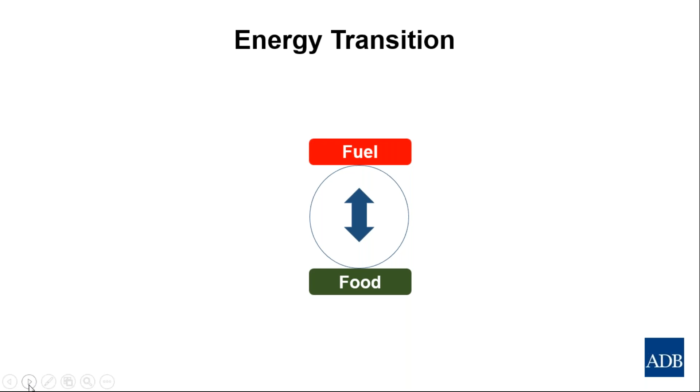So when we talk about energy transition, the common thing that you hear is food versus fuel. The bioenergy dispute in the United States between ethanol production and tortilla manufacture in Mexico was a great example of it. And most people think that's the big argument, but in fact, the argument is a lot more complex.

There's an interplay between fuel, chemicals, fertilizer, food, waste, and energy. And inside that process, where you see this multi-pronged arrow, things transfer from being a waste to being a fertilizer, or perhaps being from a waste to being a fuel, or from being food to energy, in the case of biogas. So there are a number of activities where things are interchangeable, and understanding that there is this interchangeable component means that we can then spend time and create wealth by transferring materials from one use to another.

So that's how we define waste to energy, getting the optimal use out of materials in your economy.

So we'll start off with biogas. Biogas is very, very old. The process is about 120 years old in industrial processes, but as a human function and as a function of animals, it's been going on for a very, very long time. The oxygen atmosphere that we have on the Earth, which is about 21% oxygen, is somewhere around about 600, 700 million years old. Prior to that, we had a very low oxygen content of 2 or 3%. And the bacteria that lived at those times were mostly anaerobic bacteria. That's why many of them are called archaea. So these are the bacteria that naturally occur throughout our nature.

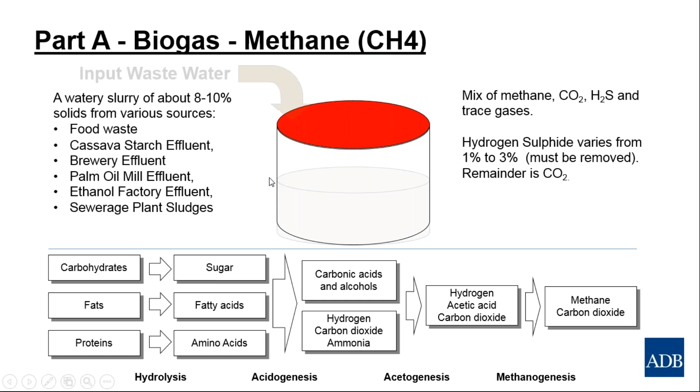You need a tank, you need a lid, you need to introduce the effluent, normally at about 8%, so it's very similar to porridge. You then need to agitate it, and I'll get to the agitation component in a minute. And in that process, you will, over a period of time, produce biogas because there are naturally occurring anaerobic bacteria. And the trick with biogas production is to choose the process that you use to accelerate the production of biogas by making methanogens come into contact with food nutrients in a quicker method. And of course, you'll get a slurry out of that, which is a biosolid.

So you can get that from food waste, brewery effluent. I was recently in Uttar Pradesh to see a sugar refinery on the back of DCM Shriram, a biogas plant on the back of DCM Shriram factory there, ethanol production, sewage sludge plants, Karachi in Pakistan, we're looking at, ADB is looking at doing projects on sewage sludge and cattle effluent in Karachi to create fuel for buses in the Red Line, which we're pitching at the moment. So there's a number of uses for this technology that ADB is employing.

One important point is the presence of hydrogen sulfide. Hydrogen sulfide is a very potent poison and has to be removed. It can be removed biologically, but it has implications on equipment when you want to make electricity, or if you're in boilers, it can have an implication on the surfaces of boilers.

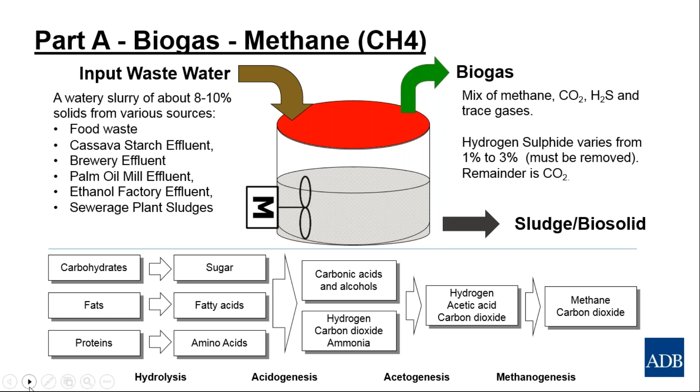So these are the sorts of things that you can make biogas from, and biogas can be 30%. Landfills are notorious for having poor production of gas, and the gas varies. You can then make it from factory wastewater. There's a lot of work going on in palm oil mill effluent, cassava, ethanol, food processing, food waste, animal feces, and of course sewage.

A key term in the production of biogas is the term COD, chemical oxygen demand, because there's a direct relationship between chemical oxygen demand and the production of biogas. There are some formulas related to what the inhibitory substances that slow it down are, but generally speaking, you know that from a palm oil factory, you might get 65% methane. From a sewage plant, you might get 25%. So it's a very well-defined and well-developed industry.

Anaerobes will only come to eat when food is put in front of them. So their life is eat, reproduce, fall asleep, wake up, eat, reproduce, fall asleep, wake up. It's probably an idealistic existence, but it would be a bit dull.

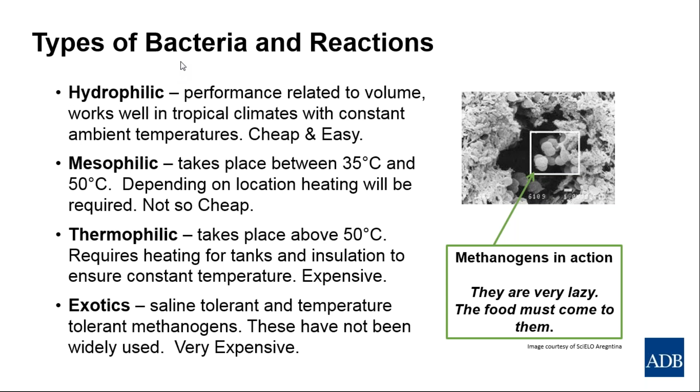You mix in the wastewater, you mix in any additional nutrients - in this case there was a root cake available from the factory owner, so we could increase the biological load. You put it in a reactor and create turbulence, moving the materials around so they interact with bacteria. You produce gas. That biogas is wet and has hydrogen sulfide in it.

You put it through a condenser to dry it out, and then you put it through an H2S scrubber to strip out the H2S, and you can vary the locations of condensate and scrubbing depending on the use and how you configure your plant.

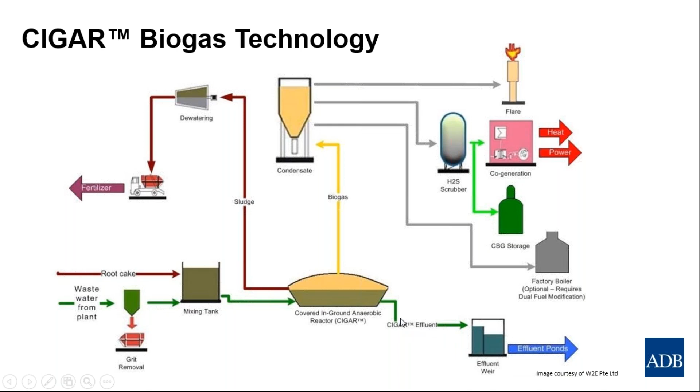It normally comes out at about 3 to 7% solids, depending on how much water you're using, and you want to try to get it to somewhere about 18 to 24% solids so that it can be transportable and usable. And then of course you have some effluent where you might have 5% or 3% of the COD load left in the effluent, which then needs to go off to ponds to be treated.

So here's some of the numbers, and there are 3 columns here. One is where the factory was operating at 55% capacity. It couldn't get access to energy because Electricity Vietnam was providing energy from across the border, and with cassava starch, the cassava rots over 3 days.

So if you don't have energy for 3 days, you've bought roots and you can't make money. So the factory wasn't making much money. Just at 55% capacity, by providing a stable electricity source...

...the project added $800,000 to the factory's profitability. And in fact, it allowed them to purchase more roots. As a result, it basically created $1.3 million worth of additional profits for the factory owner.

Now, there are a few points I should note. The emissions component here, emissions of carbon dioxide - at that stage, the price the project secured was $14 a tonne. This was in 2008, starting 2009, just before the collapse of the carbon markets.

Those prices are no longer available, but still it's a significant increase in profit just for doing biogas. If you want to have a look at those numbers, I'm sure you'll have some questions, and I'm happy to answer some of those later on after the presentation.

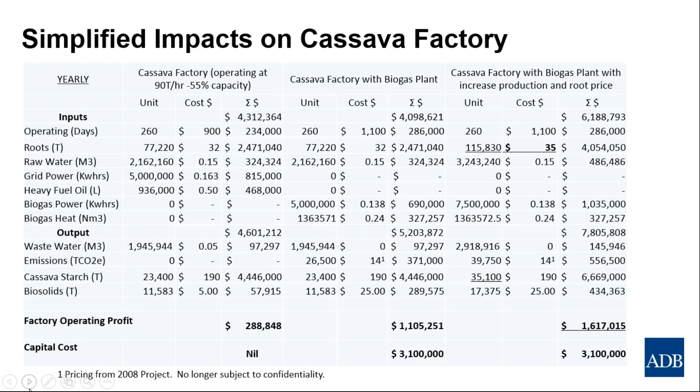Looking at the social impacts, farmers don't want to plant a crop they can't sell. Because the factory wasn't buying as much root as normal, farmers were planting different crops. When the factory started operating, they planted more cassava, knowing they could sell it, and because it was profitable and easy to manage. So as a result of the factory being upgraded, not only did the factory owner make money, but local farmers made more money too, creating a virtuous cycle: a more profitable factory means farmers get higher prices and can sell more, which increases the root supply of cassava, meaning more biogas, more electricity, and again a more profitable factory.

It stabilized. The factory is now looking to convert its entire output of native starch into compostable bags and cutlery, and is in discussion with a Taiwanese group. This project was very interesting because the biogas plant makes it a potential target for a buyout, where it can be upgraded into a very clean and green asset. So the factory owner not only got increased profit, but the valuation of the factory went up in terms of what he could sell it for. That deal is in process at the moment.

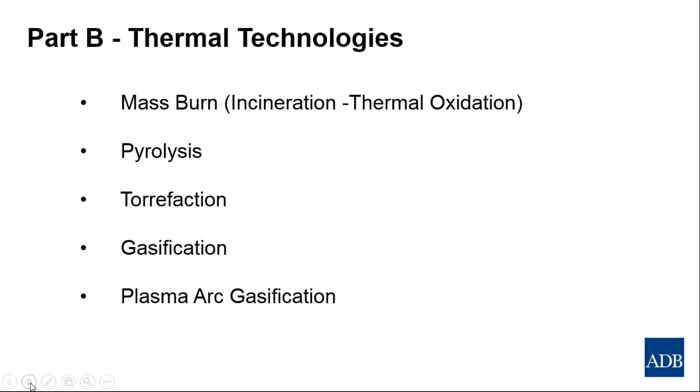So in terms of thermal technologies, there's obviously the classic one, incineration, which is thermal oxidation - you're using oxygen to drive and burn a reaction, blowing oxygen in to increase the energy. The other family is pyrolysis, torrefaction, and gasification. Technically they're different, but from an operational and output point of view they're similar types of reactions, so I've grouped them together in the explanation. Then there's plasma arc gasification, which everybody raves about and companies like Siemens have played with, but it's still not a commercially viable technology at this stage, though it may change.

Mass burn is very simple: you prepare your feedstock, put it in the boiler, bottom ash comes out, and you get energy in the form of heat, which can make steam, which can be used to make electricity, or the steam can be transferred off for heat use. Then you have entrained gases and entrained particles in the flue gas from combustion. These have to be cleaned out, and in some cases you'll get fly ash, which can contain toxic materials - I'll talk about that in a minute.

So it's proven technology. Fixed grate boilers have been used for over 150 years - it's very solid technology. Most of the boilers made in Japan and China are pretty much using fixed grate mass incineration because it's simple. I know some companies are doing more advanced gasification, and I'll talk about that in a minute, but generally speaking this is the least cost, easiest operation to use.

Depending on what you have and how your process works, you might have 10% of your mass as ash. You'll have bottom ash, which we were talking about before - that can be used to make bricks. In China they're making bricks out of it, depending on what's contained in it. And then there's fly ash.

Fly ash is a real problem for incinerating anything with chlorine, because when you have chlorine in the presence of oxygen between about 250 and 900 degrees, but especially between 450 and 800 degrees, you make a family of chemicals called dioxins, and also furans, which are persistent organic pollutants. They're very dangerous. The Americans used one of those chemicals to defoliate parts of Vietnam. It was known as Agent Orange.

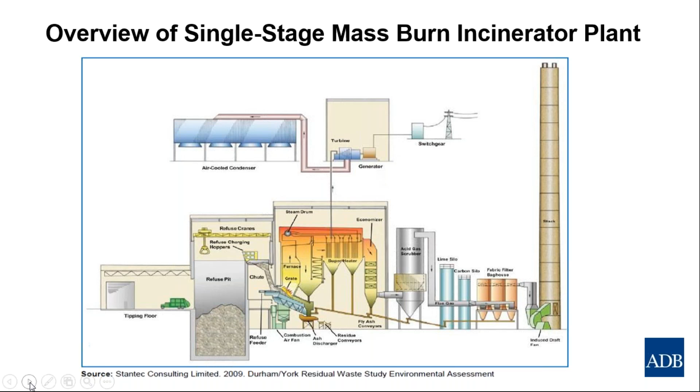I was recently at an incinerator in China, and in front of it they had a very large billboard showing in real time what the HCl, dioxin, and other gas pollutants coming out of the incinerator were. I'll try to share that with the audience at the end of the presentation. In China, every incinerator must in real time have a billboard in front showing these results, and it must be certified by a third-party body that the results they're giving are reliable.

This is an incinerator in Finland, outside Helsinki. Please tell me if people can see this.

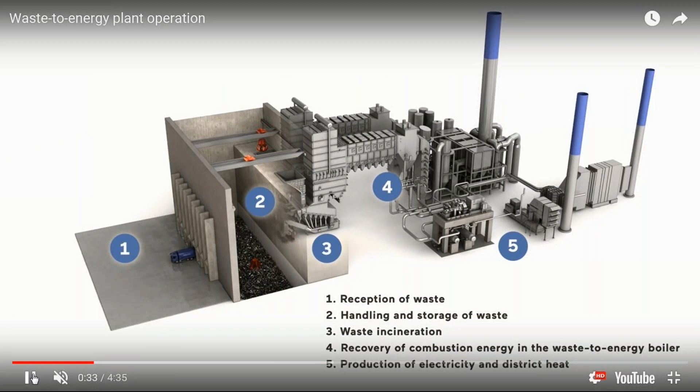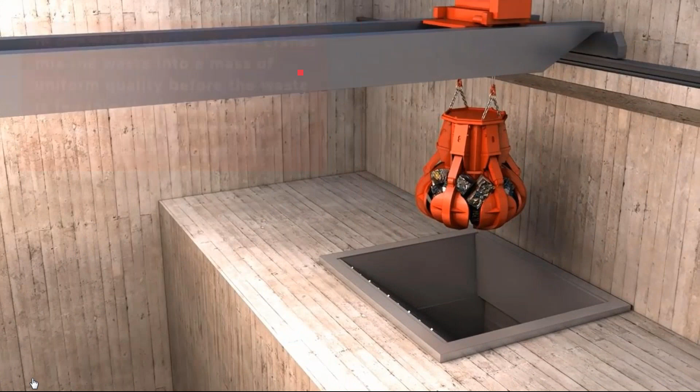So this is the basic structure of the plant. It has a large hopper. It treats about 350 tons of waste a day, about 140 truckloads. It goes into a hopper, which normally carries 2 or 3 days worth of waste, and the operators use the hopper to a certain degree to dry the material out or break it up. It goes into the chute, then is injected into the boiler, and is kept on the grate for about 2 seconds. That's typically what happens in an incinerator, and that's a good definition of what gets incinerated.

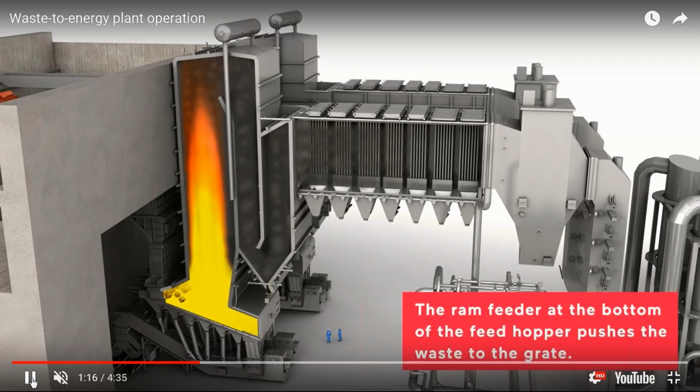The material burns, creates hot gases, and you'll see entrained particles in the gases going through. This is a very important slide, because it shows that at the surface of the grate it might be 1100 degrees Celsius, but by the time it's reached some of the boiler tubes at the top of the stack, it's 900, and as it goes through baffles, it goes to 650, then 400, then 220. By the time the material gets to 220 degrees, it's not really producing much dioxin, but in the process between the top of the boiler and about halfway through the ash removal equipment, they are forming dioxins and furans. So you need very good quality stripping of flue gas entrainment.

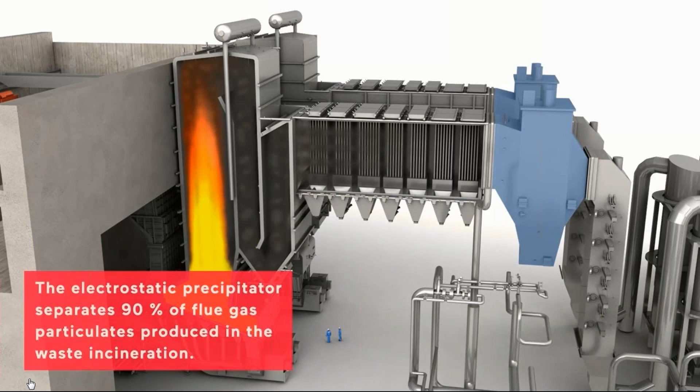So I'll start the video again and we'll go through. You'll see the gas going through. Fly ash is recovered at different stages of the process. Underneath the grate you'll have bottom ash, which falls out, but the fly ash is stripped out using a number of processes, including an electrostatic precipitator, which is pretty much a big mosquito coil—like those mosquito zapping machines that are very common. The ESP is pretty much the same as that, I know it's oversimplifying it, but that's what it does.

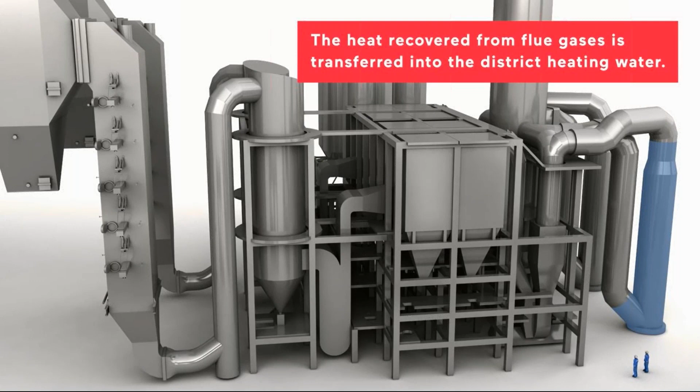Then they use lime dosing. Lime counteracts the acid component of the gases and normalizes the material. Then you have bag filters, which are very important—inside the bag filter they'll put a reagent that locks up materials like furans and dioxins before they come out. This plant has very high energy efficiency; it collects heat and sends it around to the community as district heating, a very important process in Northern Europe because heating costs are a tremendous cost.

By the time the gas gets released, it's about 50 degrees Celsius, which is still quite warm, but it meets all the European directives for release of gas.

The issue with incineration is that whilst the process is energy efficient, it's expensive to build an incinerator, and you do have an issue with fly ash, which is the limiting factor in its success in rollout. A lot of the work we're doing at the moment is looking at new solutions for how we can deal with fly ash, how we can chemically immobilize it, what we can do in terms of creating ceramics using hot isostatic presses and other activities.

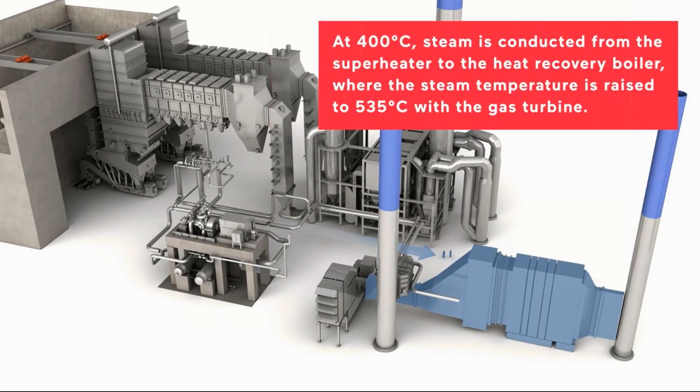This talks about the heating and cooling system. You're basically stripping heat out of the gas and using that, and then it goes off to a turbine, producing electricity for the local community.

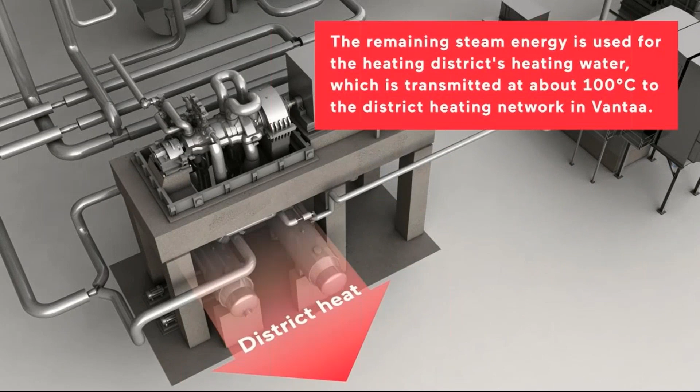But the district heating component of this makes this technology the most attractive. In China, it's very well adopted because of its capacity to provide district heating. One of the projects we're involved in is looking at providing district heating and options for people currently using coal in the areas around Beijing, Tianjin, and the Hebei area. There's a large amount of investment in getting people to have area heating during the four months where it's very, very cold in northern China.

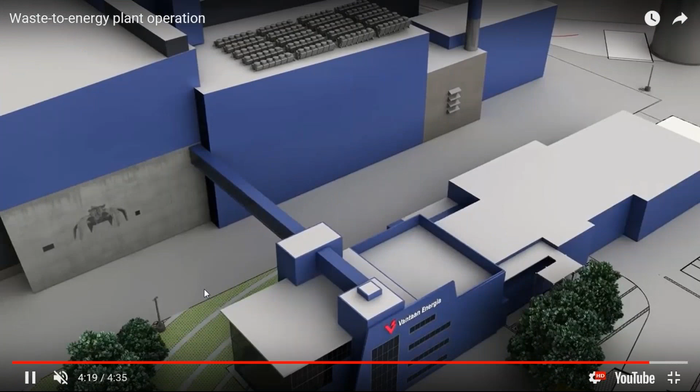This means that they don't burn coal, which means there are not the levels of pollution that currently occur in Beijing. And certainly Delhi has that problem. I was in Delhi about four years ago, and the pollution in Delhi was very, very bad. So perhaps that might be some learning that can get transferred across.

Let's go back to the presentation, and I'll restart the slideshow. So we've done that slide.

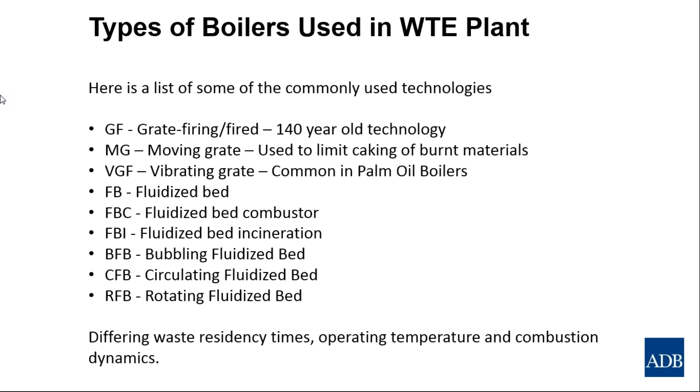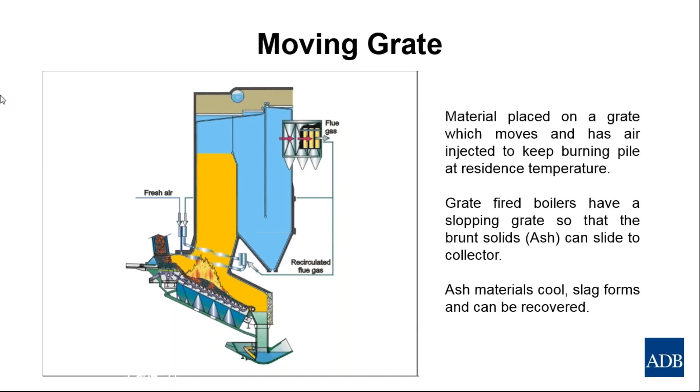A moving grate is pretty simple - it's basically placed on the grate and it burns. That's pretty much it, and bottom ash comes off, with possibly some slag depending on what's entrained in the materials. If you're doing something simple like wood chips or empty fruit bunch or cassava, you won't have much gas treatment needed because you're not likely to have entrained dioxins or chlorines. But if you go to a bubbling fluidized bed, you'll see how that process varies.

Excuse me, sorry, we just had a power outage. Can you hear me? Yes, I can hear you and I can see the screen as well. We just had a power outage in Manila. Oh, it's fine, we at South Asia are also used to these power cuts. Yeah, I know, but it was pretty good because the power came back on in literally a quarter of a second, so that was very good.

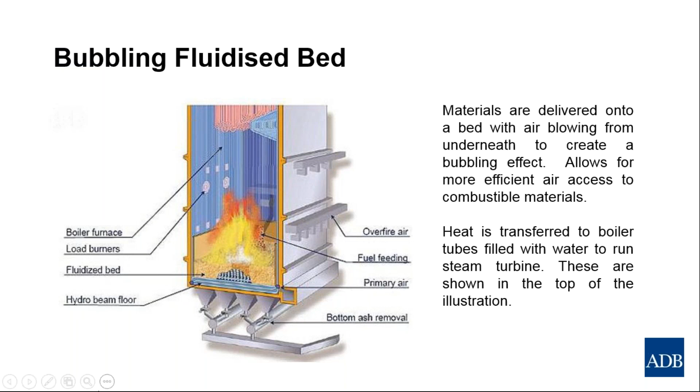So key terms - many of you will know these, but I'll go through them again. Megajoules is a measure of energy, and there's high heating value and lower heating value - how that is determined varies. There is a difference between the high heating value and low heating value of a material. Nitrous oxides - NO2, NO3, NO4, SO2, SO3, sulfur oxides. CHONS is very important - the relative proportions of carbon, hydrogen, oxygen, nitrogen, and sulfur are a determining component of which particular technology might be better.

Heavy metals - everybody talks about them, but here I've actually specifically spelled out what they are: cadmium, mercury, lead, arsenic, manganese, chromium, cobalt, nickel, copper, zinc, selenium, silver, antimony, and thallium.

Just as an aside, I was recently in the Marshall Islands looking at a project, and there was a technology introduced there to mass burn plastics waste in the open, which we gave some very strong commentary about that not being a great idea. When the ash was tested, it had a very high chromium content compared to everything else. That was quite a remarkable outcome, we thought.

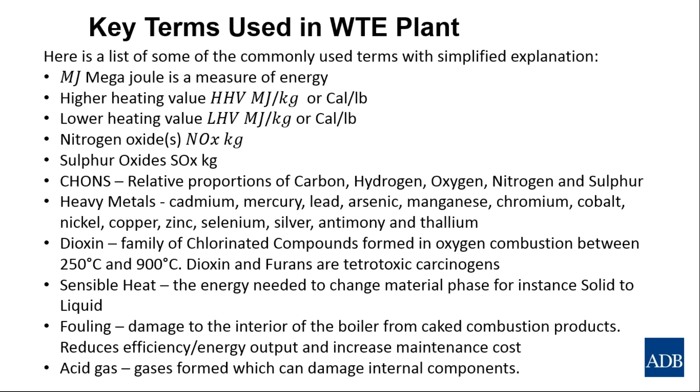Fouling is where you get caked materials that look like they're sandblasted onto the interior of facilities, and that has an implication on the operations and maintenance component. Acid gases are gases formed which are quite damaging to internal components, and that's because of the presence of sulfur and other materials.

Pyrolysis is thermal decomposition in the absence or near absence of oxygen, and it produces syngas. I know that India, especially Ankur Scientific, are extremely good at making small gasifiers for agricultural applications like rice husk. They're very popular in Southeast Asia. So this process of gasification and production of syngas is well known.

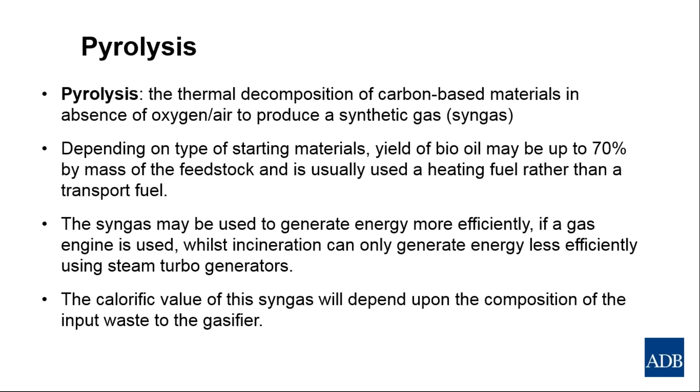With pyrolysis, you don't make so much syngas, you actually make more bio-oil, and you have tars as well. The next step is to step up to gasification, and that gasification process is the one that's very, very popular in Southeast Asia. Again, it's just a difference in temperature and a slight difference in process, but they're a family of materials.

Now, people will tell you, 'oh, we don't have any oxygen, so we don't create dioxins.' That's not entirely true - you can't say they're not produced, you just say they're below detectable limits. I've seen documents from suppliers in various parts of the world claiming no dioxin is produced, and you should be very careful of that, because there's oxygen in the container, in the materials, when you start the process.

Torrefaction is another process which occurs at slightly lower temperature. It's used in Australia extensively to deal with dead animals from a biosecurity point of view. Large chicken farms and large beef farms have a lot of dead animals, and also a lot of waste, which is obviously a biohazard under Australian law. So what they do is treat it in a pyrolysis process, and that is then able to be used as a high surface area biochar, which is very useful for entraining nitrogen-fixing bacteria and other things in the soil. So it's sought after by farmers to buy that product.

Plasma arc gasification - if we lived in the world of Star Trek, this would be the ultimate technology. It just decomposes everything down to a glass slag and maybe a bit of entrained metals. The only problem is it's about 4.5 to 6 times more expensive than currently available technologies, and also it's extremely difficult to operate.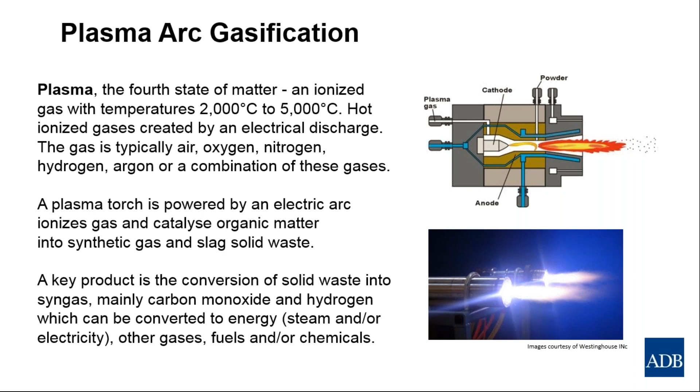In the mid-1990s, Siemens had an explosion in East Germany that killed 6 people, 2 of whom were PhDs working on the technology. So it was originally developed by the Russians, as my understanding goes. And when you see the space shuttle, that's actually a plasma arc made by Westinghouse, which is injecting a spark to light the bottom of the space shuttle so it can take off.

So this is a process from a project in Malaysia, on the site of a paper company in Pahang, and they have fuel storage. The most important thing for these technologies to optimize them is the handling and feeding into the boiler. In a large municipal solid waste incinerator you have a little bit of flexibility about what you can do, but in these processes where you have a fixed biomass, fuel handling is very important to make sure you get optimal results. So it's basically 4 stages: fuel handling, steam boiler, steam turbine and generation, and then water treatment within the configuration.

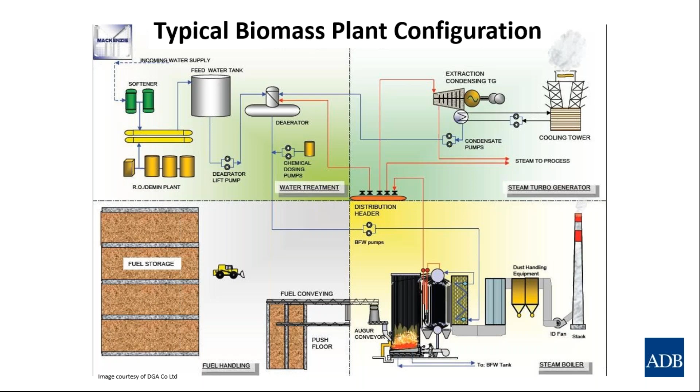So here's some numbers from this project. Again, it was 2008 - I can't show you things from the last couple of years because many of them are still subject to confidentiality, I must apologize for that. But 3 mills in this particular area were going to collaborate, and they made about $300,000 a year selling their empty fruit bunch off as fertilizer, and that was good money to them, shared amongst the people who managed the mill.

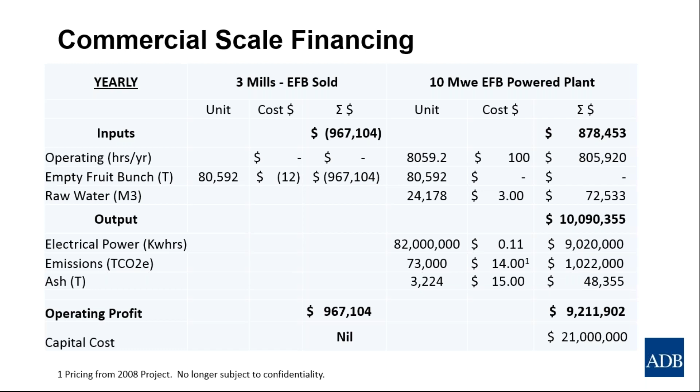But if you look at combining the empty fruit bunch from these 3 factories, you could actually generate about 10 megawatts of exportable electricity. That then means your operating profits would be about $9 million based on the carbon price at the time, and maybe 8 million without it. Electricity was in this particular area in short supply, so the payback was about 3 years. It was a quite attractive project. A number of these projects were done. This one wasn't done because the 3 mills decided they couldn't get on and had problems communicating with one another, which is a great pity.

On the other side, there's a lot of people who've been lifted out of poverty from this. About 10 years ago, I remember sitting in the living room of someone in Central Sumatra telling me how 3 of his kids went to university and 4 of them ended up joining the military and getting educations in the military because of his involvement in palm oil. So I think you need to look at the positive and negative sides of it. There's still a big argument about palm oil, but I think it's not so black and white.

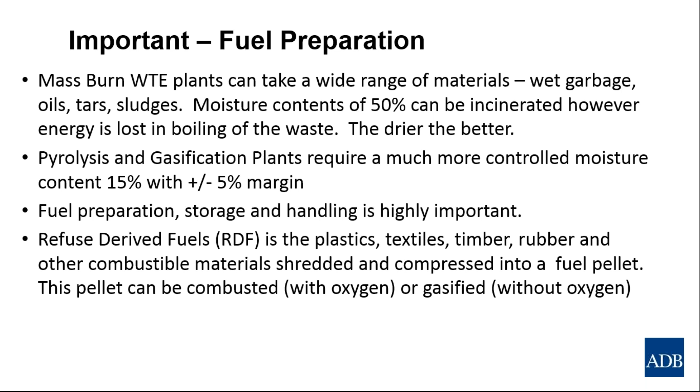But as I said, the most important thing is fuel preparation for any thermal technology. If you have a gasifier and pyrolysis, you have very, very tight margins on the fuel moisture content. One of the things I haven't gone into much detail is refuse-derived fuels - when you have plastics, textiles, timber, rubber, and other combustible materials, commonly they contain a lot of chlorine, specifically textiles and plastics. If you turn those into fuel pellets, you need to combust them where you have controls for dioxin. But one of the other options is to use them in cement production - sell them off to cement factories, because cement factories commonly burn car tires to generate heat for the process to make cement. So the RDF component works very well with cement mills without having to build large pieces of infrastructure.

Next one is municipal solid waste. This is a different approach to municipal solid waste. This was sort of partially tried in a number of places in India, and I'd be interested to get feedback from the audience. They had great difficulty operating the digesters because there were obviously some contaminants in the digesters, and also the digester is an agricultural process, it's a biological process.

It's not really like a car where you turn the engine on and the car runs. Sometimes the gas is produced, sometimes it's not produced as much, so it's a bit more like managing cattle than actually driving a car. To manage this process, you need a little bit of subtlety and a bit of patience.

But effectively, you take waste, you strip what you can out of it, you shred it, you pulp it, or you can put it through a trommel screen. But ultimately, what you want to end up with is an entrained amount of organics that go into a digester with as little plastic and as little contaminants as possible.

Then the process is very similar to what we talked about in the cassava factory, probably a little bit more controls. But then you have a market for the recyclables. So it's a choice between building a large incinerator or building a smaller biogas composting type approach.

Many countries, especially India at the moment, because of the closer relationship with China, are actually building incinerators to change the way people collect and run waste. We're seeing these types of projects come in, and we're not sure how that's going to work in India, because South Asia obviously has some very clear supply chains for the collection and handling of waste, so we're still working out how that will deliver.

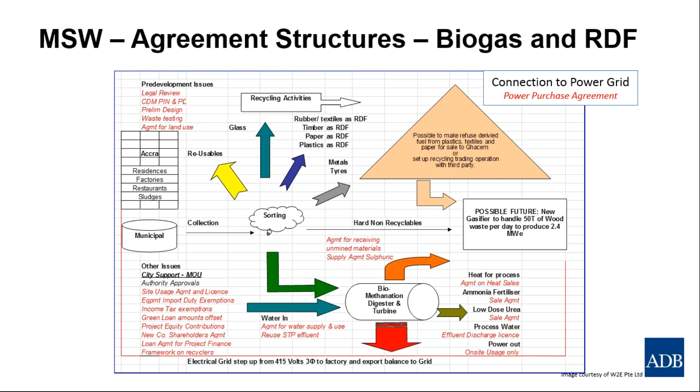It's a very important business, but it hasn't got the level of attention from the international community that perhaps it should have. So in Ghana, they couldn't afford to build a large incinerator, but they could get access to about $56 million worth of capital cost. This project had an IRR somewhere around 14 or 16%, which is not great, but it certainly passes hurdle for economic analysis.

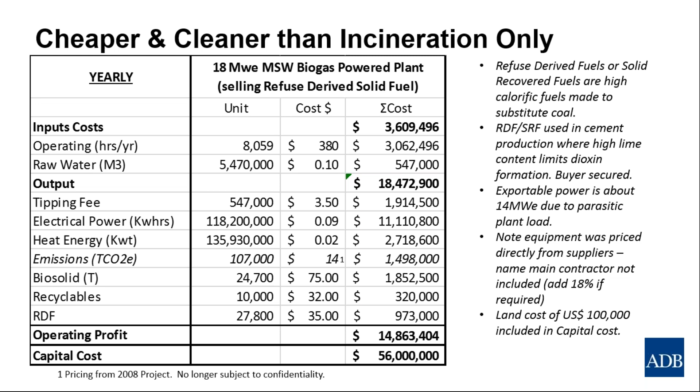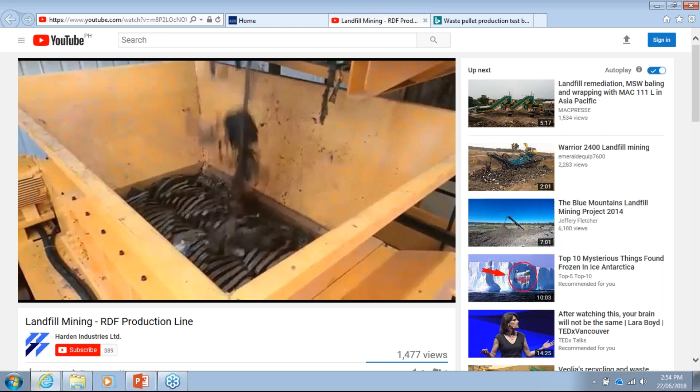It has holes in it, to strip out the smaller organics. Then the larger organics go on a conveyor belt, then into a shredder. Anything the size of a small Yakult bottle will already have come out, and then it goes into a shredder. That's not a place to fall into—certainly a very, very dangerous piece of equipment.

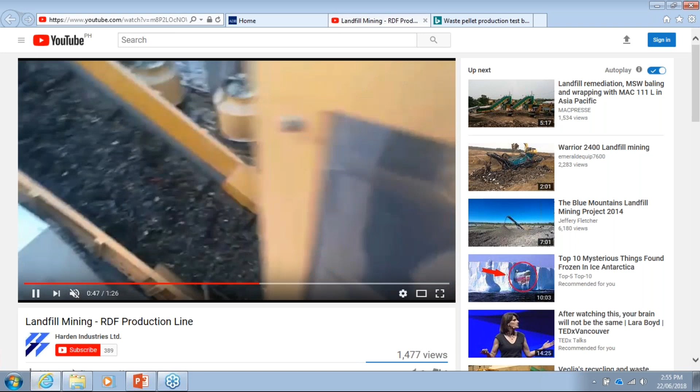Then that gets chopped up to a smaller size—they may even chop it up further. And then they have a number of choices. In this particular video, this is a landfill that they've dug up, and then they're taking this material and baling it into meter by meter bales. You'll see them baling it here, and then that gets shipped off to be incinerated.

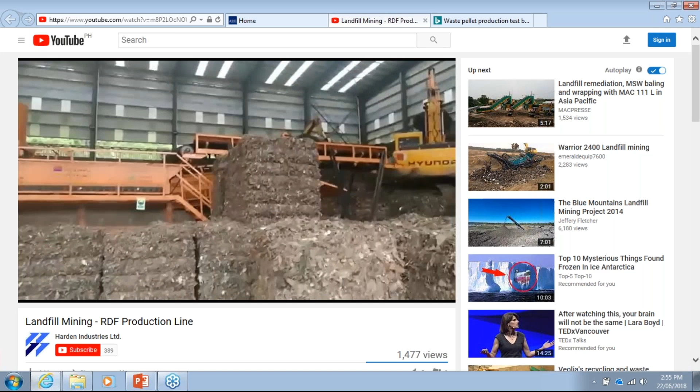I'm not sure what the use of that is—it may be an incinerator, it may well be a cement factory, but that is a common process. Notice the guy's wearing a lot of PPE. He's wearing safety equipment because there's a lot of material in there that's perhaps not so great to inhale.

Okay, so then I'll show you another one, where instead of doing a small bale, you do a pellet. This is a machine in Thailand. All it is, is a rotating die, and it just makes a circular pellet, and you'll see the entrained solids and the plastics in there. That's a very small machine, and it makes about 100 kilos of pellets an hour.

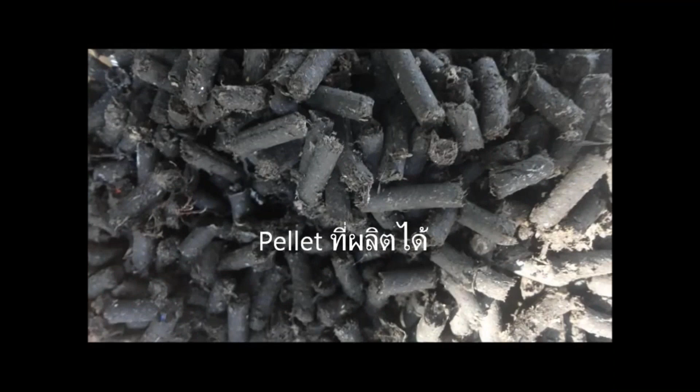That is used for shipping. It's a lot easier to ship that in bags than to run the bales. Plus, bags don't leak as much, and they sometimes use cassava starch just to bind those pellets together, mixing in cassava starch so they have a discrete form. That pellet is a lot easier to burn because it's more consistent.

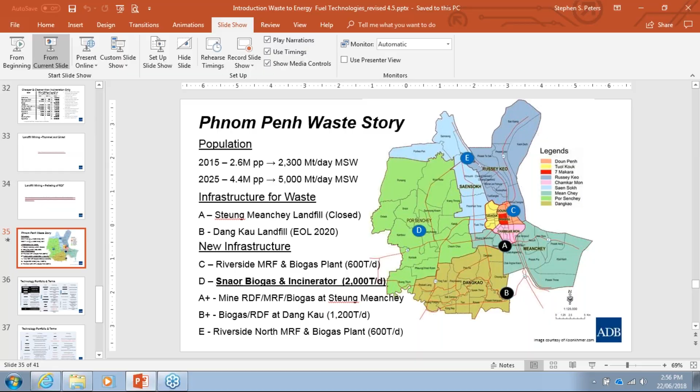So that's another type of technology, and I'm going to turn that off and go back to our presentation. I wanted to talk very briefly about some planning. Phnom Penh, the capital of Cambodia, is experiencing phenomenal growth.

In 2015, there were basically 2,300 tons of waste a day. By 2025, they think it'll be more than double that at 5,000. They currently have a dump site at Steung Meanchey, which is closed, right on the edge of the very densely populated Doun Penh, Chamkar Mon, 7 Makara area. What they decided to do with the help of the World Bank was build a landfill at Dang Kau, further out of town, which is actually very close to the killing fields, if any of you have been to Cambodia.

So Dang Kau is now almost fully used. It's very unlikely it will be usable in the 2020s, so they need a new solution, and they need it quickly. A number of organizations have looked at planning this.

So they need some new infrastructure. They need about 40% of their capacity as an incinerator/biogas plant. The plan was to put that in a place called Snaor, outside of town. It's very difficult to speak Khmer, but Snaor is not particularly population dense now, though it will be by the 2030s and 2040s.

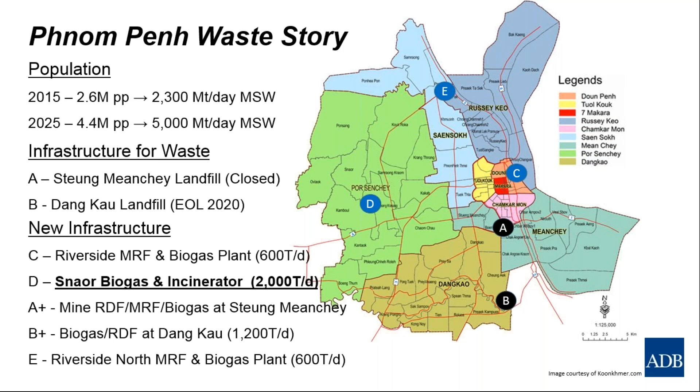So we suggested to them that they do an incinerator, but not one handling 5,000 tonnes—rather a 2,000 tonne incinerator, and then spread treatment out across the rest of the area to allow people to make money out of plastics, biogas, and other technologies. Building a 5,000 tonne incinerator means trucks bringing 5,000 tonnes a day of waste into one area. That centralized model doesn't work well at that scale, because it means a lot of rubbish trucks on the road, and it has health implications.

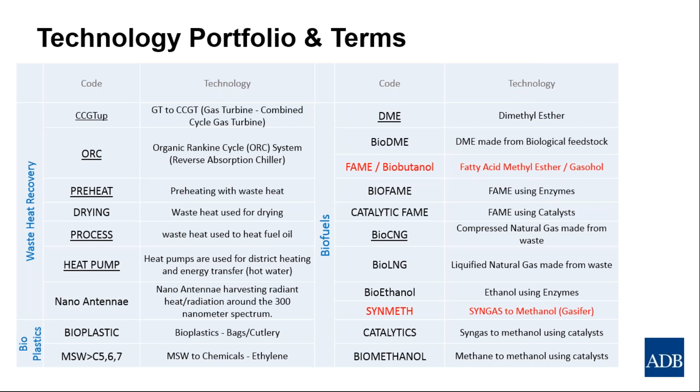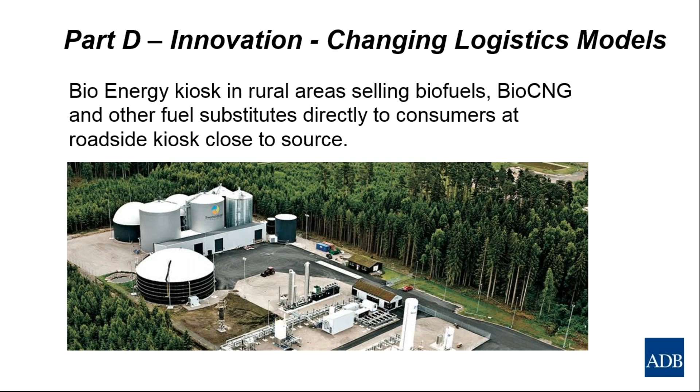That makes financial sense in Sweden. Now, obviously, that's not going to make financial sense in countries without a CNG industry. But if you look at the penetration of CNG in Pakistan, you'd wonder why Pakistan is not doing more of this type of work. That's some of the things we're trying to look at and assist people with, to demonstrate those projects so people can get the confidence to do them. There's a really wonderful group of projects going on in Rotterdam at the moment.

There are two organizations, but the biggest is Enerkem, a Canadian company. It's looking at taking waste and converting it into methanol and some base level plastics. This project has $1 billion worth of investment, with Air Liquide and AkzoNobel as shareholders, so it's a very, very large project. I think in 5 to 10 years it will become a very common way for people to treat plastics and other materials, to recycle and recover plastics so they're used again, because we have a very large backlog supply of plastics currently ending up in the oceans, and we can make money out of those while investing and making returns.

This is more than likely to occur in free trade zones and around ports. That's our expectation of how this development might go forward. We don't think it will be done at small city level, or by municipal authorities. We think it'll be done by multinationals working out of these free trade zones. That's a process I'd suggest you keep your eyes and ears open for.

So building a very, very large incinerator means these type of projects can't get up or get access to materials. That's why we're suggesting don't build a very large incinerator, just build an incinerator for the things you absolutely have to incinerate.

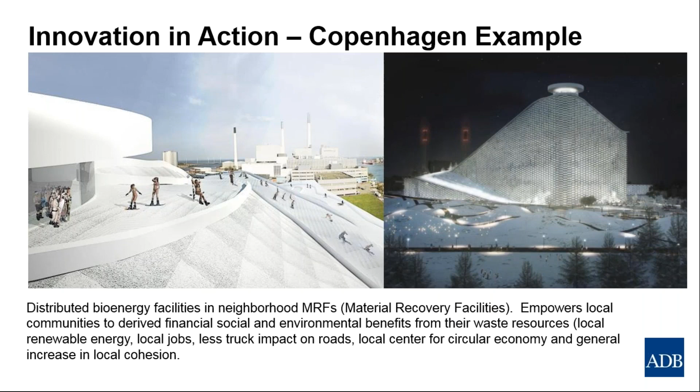So on that note, I'd like to thank you for your time. I'm sorry if I've gone over on the presentation, and I'm very happy to take your questions. Thank you very much.

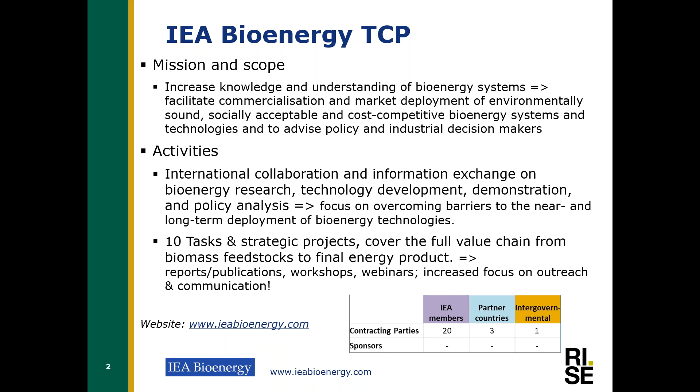Task 36, which I'm the leader of, looks at integration of energy recovery into solid waste management. We are also moving a bit more towards the role of waste to energy in the circular economy, hopefully for the next triennium. The work is done mainly with 2 meetings each year, associated with workshops and technical visits. We're also doing some smaller studies or case studies that we publish as task reports, which are or will be available on our webpage.

I've given 3 examples here just to show you what it could be. The current members are France, Germany, Italy, and Sweden, so it's very European right now. For the next triennium, we hope to get Australia, the US, and maybe Canada, and we are looking for more members. At the last ExCo meeting, India actually participated, and we are hoping that India will join IEA Bioenergy, and I personally hope they would also like to join Task 36, looking at waste to energy and waste management.

RISE, which is my employer, stands for Research Institutes of Sweden. We are fully owned by the government of Sweden. We are a research institute, a polytechnical one, and the largest one in Sweden.

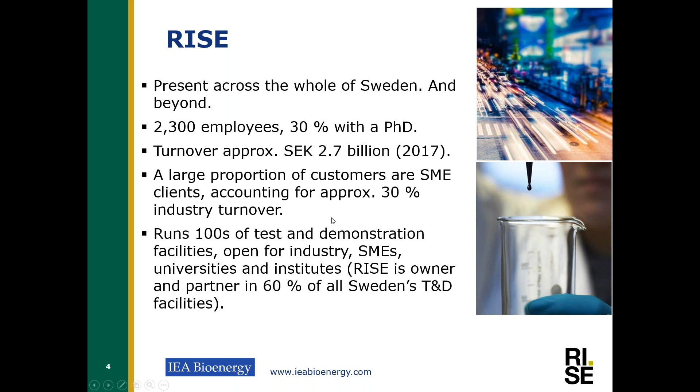We are working in a lot of areas, so this is just to give you an example, and you will get the presentation afterwards, so I won't go into the details. But we're working on anything from life science to energy, vehicles and vehicle safety, concrete, glass, wood, most of the different materials that are around, graphene, and other things.

Waste refinery was mentioned before, and that's one example where we are working together with academia and industry. Today it's a strategic network, though it has also been a research network. It's cooperation between academia, universities, institutes, society, and industries. In this case, society is some municipalities and waste management branches or administrations of the municipalities.

We are working together in common projects, trying to develop projects where we partly get financing from our partners in the network, but normally apply for publicly funded research projects as well. We're doing a lot of networking, and we can get answers quite efficiently just by putting out a question, since there are many competencies that can easily answer shorter, simpler questions.

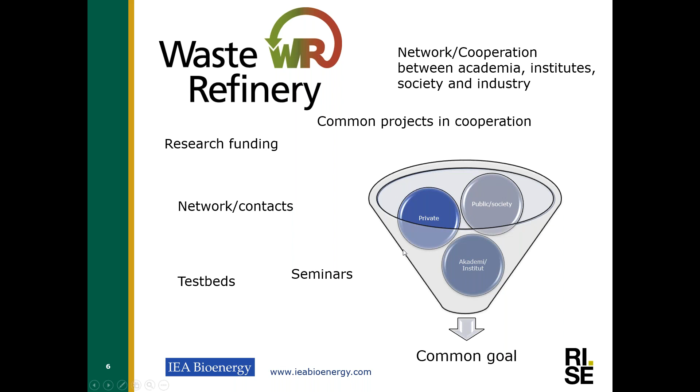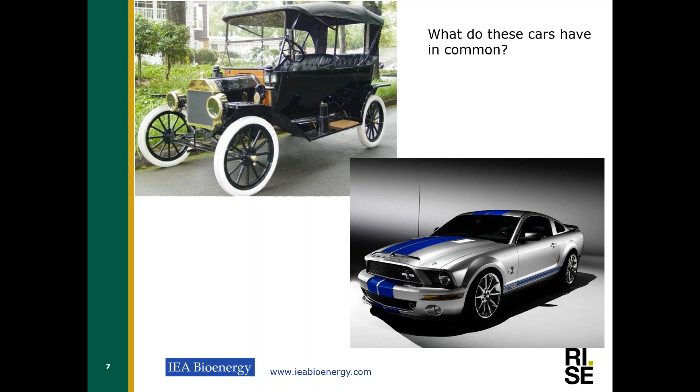I usually, when speaking about waste to energy, start with this picture. You'll understand why in a minute. I usually ask people what these cars have in common. Well, actually, they are both Fords. They have four wheels and an internal combustion engine, but more or less that's where the similarities stop. And they have about as much in common as these.

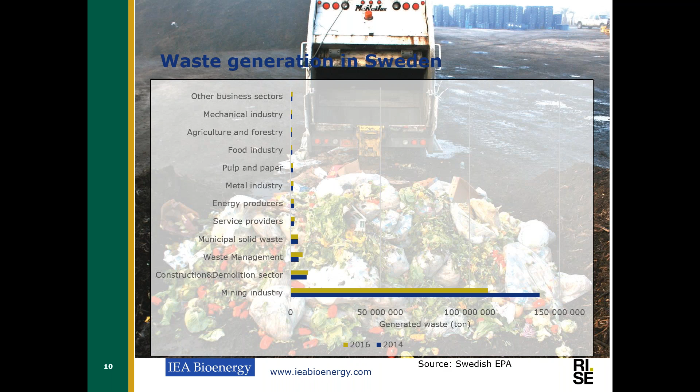If we look at the waste situation in Sweden, we have one major contributor, the mining industry. Mining is a very large industry in Sweden, and it generates a lot of waste. However, I won't go into that because waste to energy in that sector isn't that interesting. I'll focus more on municipal solid waste and some industrial and construction demolition waste.

If we look at municipal solid waste in Sweden, it's around 4.5 million tons a year, so around half a ton per capita each year. If we look at treatment today, more or less 100% of the waste is collected. Some waste is of course dumped in some places, but it's not a very large problem in Sweden generally, since there are well-functioning services for waste collection.

We are around 50% going to material recycling and biological treatment. That's not the same as 50% being material recycled, but that's what's collected for material recycling and biological treatment. Then approximately 50% goes to waste to energy. In biological treatment, you also have some waste to energy because of anaerobic digestion, but since we're recovering nutrients, that's classified in statistics as material recycling, not waste to energy or energy recovery itself.

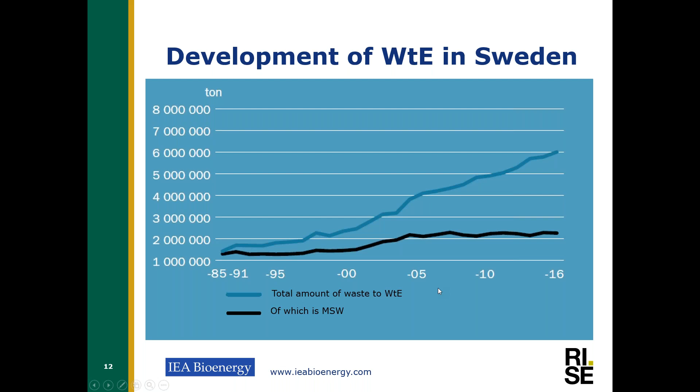So now the Swedish plants, as they say, are offering a treatment service to the rest of Europe. It's mainly Norway and the UK currently, but there have also been other countries delivering waste to Sweden. And in this case, the plants are not buying waste, or they are buying waste at a negative price, so they are taking a gate fee to receive the waste.

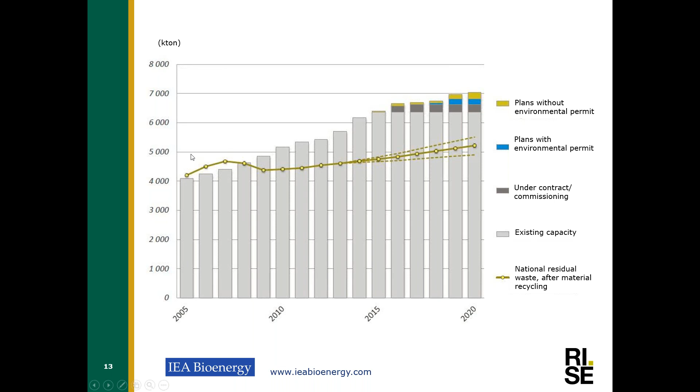We also generate electricity. So we are generating a bit more than 15 terawatt hours of heat each year. It's also going to industries, like there is an ethanol plant being provided heat from a waste combustion facility. There is also a paper mill being provided heat from a waste energy facility.

And when we look at the biogas, we are mainly converting it into vehicle gas, because that way we will replace fossil fuels directly. When we are using it as heating and powering, it's competing with biomass, water power, and other renewable sources. So the benefit from an environmental point of view has been great on vehicle gas.

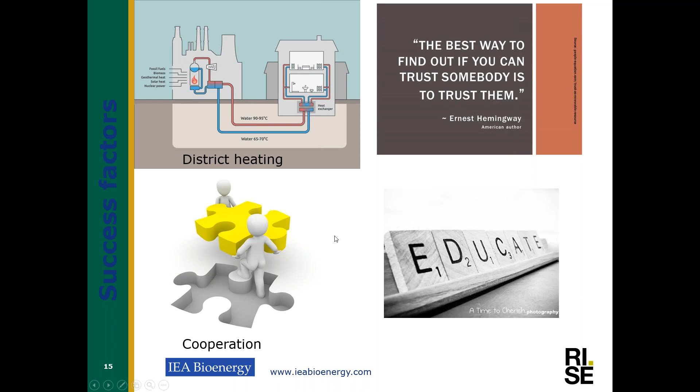Our previous speaker also mentioned something that would come back here: looks do matter, even if they say it's the inside that's the important thing. Looks do matter, and it's a trend we see.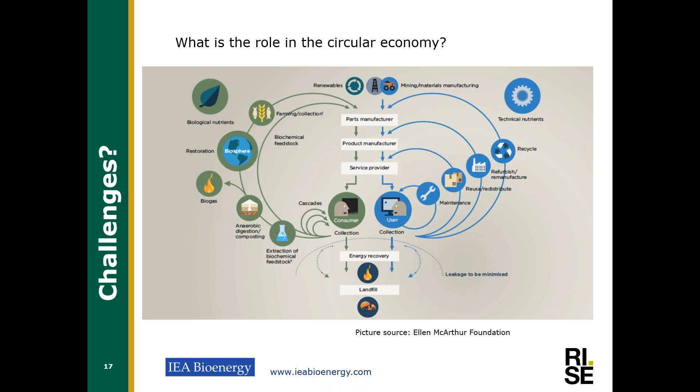One aspect that has become quite large in Sweden now is that municipalities, as well as the government, are adopting a vision of having a fossil-free energy system, both energy and transport system. Then you have the problem of how to tackle the plastic going into the waste-to-energy plants.

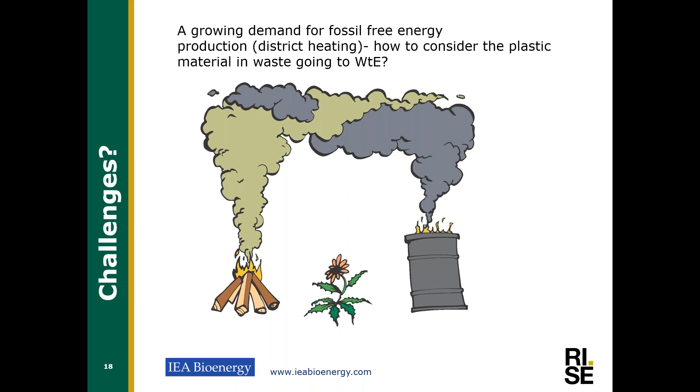There are definitely plastics today that neither the material companies nor the authorities want to recirculate into the technosphere, because they can contain flame retardants, PCB, and other non-desirable substances. I guess we will see if the Enerkem solution or other feedstock recycling options—gasification or other thermal cracking of chemistries, or biological options—can be a solution to that.

Residues and ashes was one area already mentioned by the previous speaker; that is a challenge. In many countries in Europe, the bottom ash or slag is used in construction purposes for roads, parking lots and other things. In Sweden today, not so much—it's used as construction material on landfills, but we have not succeeded in getting acceptance to use it in roads. There has been some work done on it, but it's not widely used today, and that's also partly down to the legislation and policy side.

What we do see is an increased interest in actually recovering metals. In Switzerland, there's a plant producing pure zinc from the fly ash, looking at that as an urban mine. That's probably something that might come along more.

Legislation is a challenge, but it can also be an opportunity, like in the UK case when they put in the landfill tax. Another case is biogas: in Sweden, the government decided to stimulate its use through an exemption on CO2 tax as well as energy tax, making consumption cheaper. Meanwhile in Denmark, they've put a production support in place, giving an incentive per cubic meter or megawatt hour of gas produced. The problem is that when the Danish export their gas to Sweden, they get both incentives—the production support as well as the tax exemption. Legislation and incentives are important, but it's also important to coordinate them.

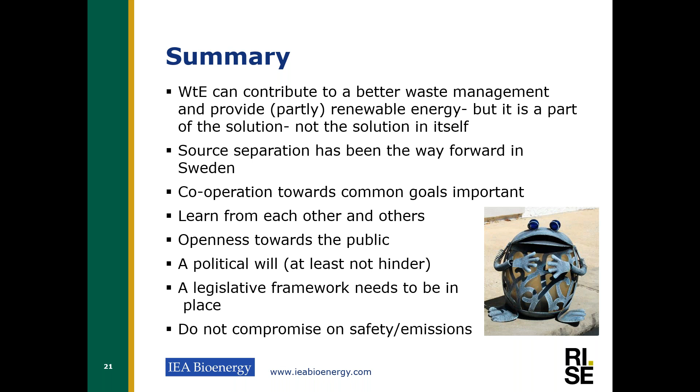You need political will, or at least that they are not against the solutions. You need to have the legislative framework in place, especially on waste management, but also the integration of waste management into the energy system. And do not compromise on safety or emissions, because then you can kill the whole future for waste to energy in the business.

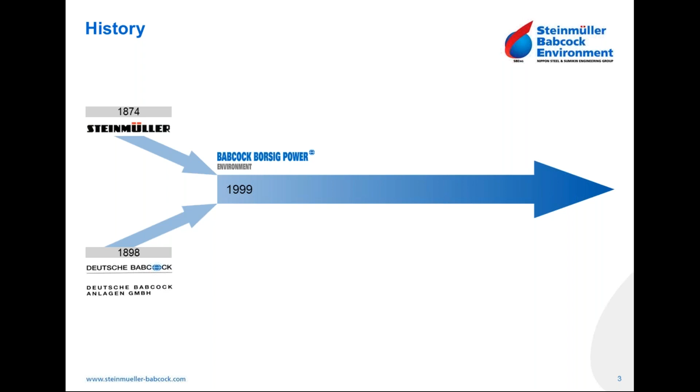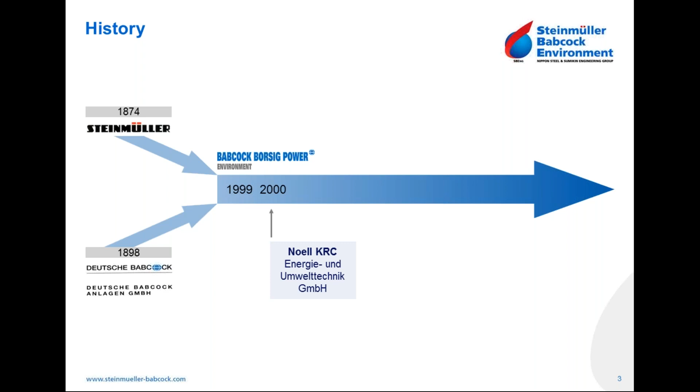Then, at the end of the 20th century, they merged with each other and created two companies from Steinmüller and Deutsche Babcock: one is Babcock Borsig Power Energy, the other is Babcock Borsig Power Environment, in which we are now operating. After 2000, the company also involved Noell KRC in this group; they also installed waste to energy plants and environmental technologies. In 2002, the company was totally separated from the Babcock group and taken over by the Italian company Fisia Babcock.

It operated under the umbrella of Fisia Babcock Environment up to 2014. In 2014 the company was taken over by the Japanese company Nippon Steel, and since 2014 we are operating under the name Steinmüller Babcock Environment. That's very brief historical information about our company.

We are a middle-sized company.

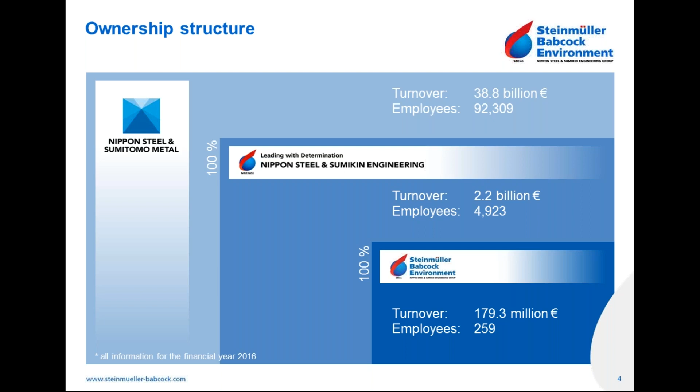That's fine. Okay, now our company is a middle-sized company with a number of employees, nearly 250 people, most of them engineers. We have an average turnover value each year of about 180 million euros. Our mother company, Nippon Steel & Sumikin Engineering, is located directly in Japan, Tokyo, and they have nearly 5,000 employees, with a turnover of about 2.2 billion euros each year. The mother company of the mother company, our parent company, is Nippon Steel, the second biggest steel producer in the world after Arcelor, and they have about 90,000 employees overall in the world.

Our head office is located near Cologne in Gummersbach, Germany. We also have a mother office located in Tokyo. Overall in the world, we have some branches and cooperation partners who have taken our licenses.

Our company is a typical engineering company. We are making all of the waste energy plant components, basic and detail engineering. We also have a project management system for the execution of the project, and a quality, health and safety management system. Of course, we have the procurement and logistics organization system, and we are making construction and commissioning. That means we are a typical EPC company for installing such waste energy plants.

Now we are coming to our core problem, energy from waste. How we can handle the waste, how we can produce energy from the waste.

Worldwide, our company has 646 references until now. Most of them installed in Europe, second is in Asia. We can handle municipal solid waste, RDF waste as refuse derived fuel, industrial waste, biomass, sludge, tires, and hospital waste with several systems.

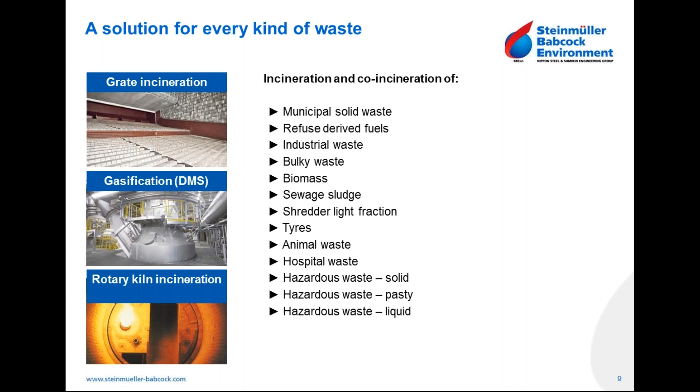In this combustion chamber, the grate system, the waste will be burned, incinerated, and also moved from beginning up to the end of the grate. During this process, all waste will be burned, and all slag and non-burnable materials will be removed from the system. After the burning, of course, we are producing flue gas at a high temperature.

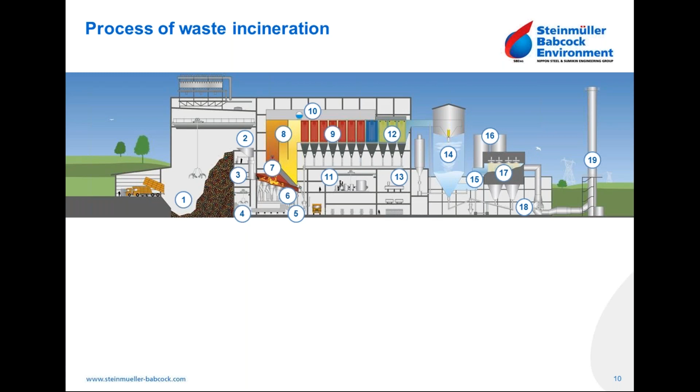Of course, the flue gas cleaning system after this reactor is more or less the same as in the incineration system, but the slag amount compared to waste incineration is much less. This system is more expensive than waste incineration in operation and installation, but it makes sense for island countries like Japan and other island countries, since you can reduce the landfill volume needed after the waste incineration system.

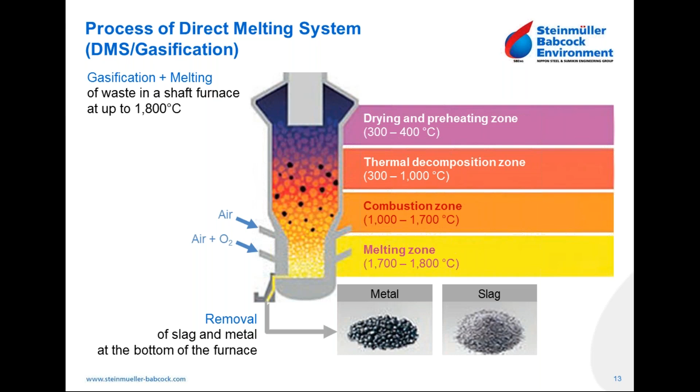I would like to show you a few highlights from our history and references. For example, we installed one energy-from-waste plant in Herten, Germany, with 6 lines. Two lines are for hazardous waste and 4 lines are for municipal waste. The hazardous waste line is a rotary kiln system, and the municipal waste uses our forward-pushing grate system. All lines are installed by our company, producing 52 megawatts thermal energy each line, with a smaller line producing a bit less, and we burn 17 tons per hour of waste in each of these lines.

Another one of our biggest waste energy plants is in Acerra, Italy. We have 3 lines, each foreseen for nearly 30 tons per hour of waste, producing 113 megawatts thermal each line. Each line is connected to one steam turbine, producing electrical energy for all 3 lines together of about 120 megawatts - one of the biggest waste-to-energy plants we have installed until now. I'd draw your attention to the caloric value of this waste - one of the highest, at 15,000 kilojoules per kilogram. Only in that way could we produce this high energy from our system with 30 tons per hour.

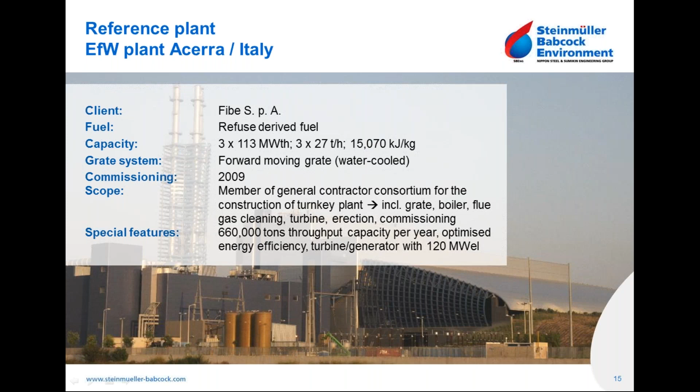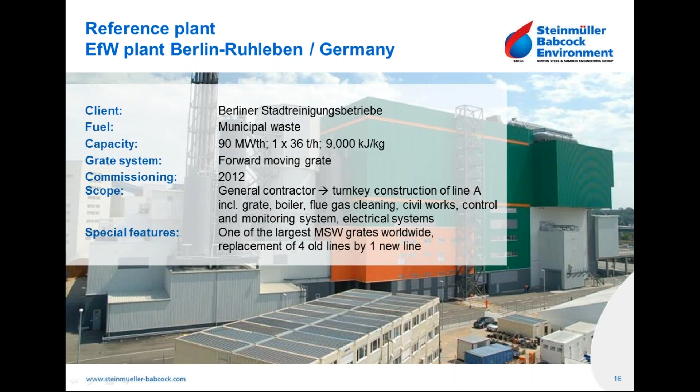Another example from Berlin - we installed one of the biggest grate systems there. With only one line we can incinerate 36 tons per hour of municipal waste, with a boiler capacity of 90 megawatts thermal. This plant was installed as EPC directly by us - everything planned, installed, and commissioned by our company. We were the general contractor.

Another example in Lithuania - we have one of the biggest grate systems installed, for a capacity of 34 tons per hour, with a boiler capacity of 85 megawatts thermal.

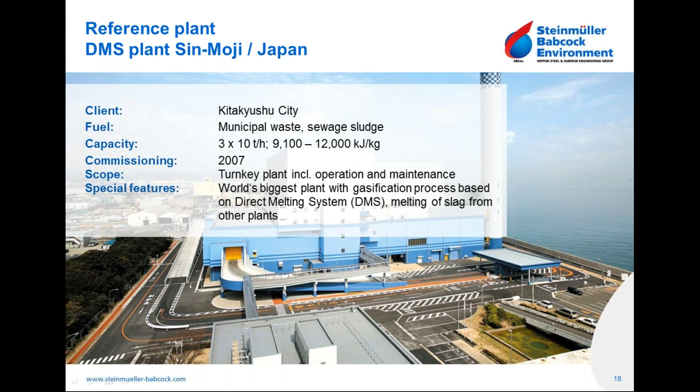An example for the DMS direct melting system in Japan - we have 3 lines, each foreseen for 10 tons per hour, with a caloric value of between 9,000 and 12,000 kilojoules for the waste being melted.

I wanted to give you with this presentation a short impression of how our company is working, which technology we have, how we can reduce the volume of municipal waste, and which references we have. I hope it was useful for you. Thank you for your attention.